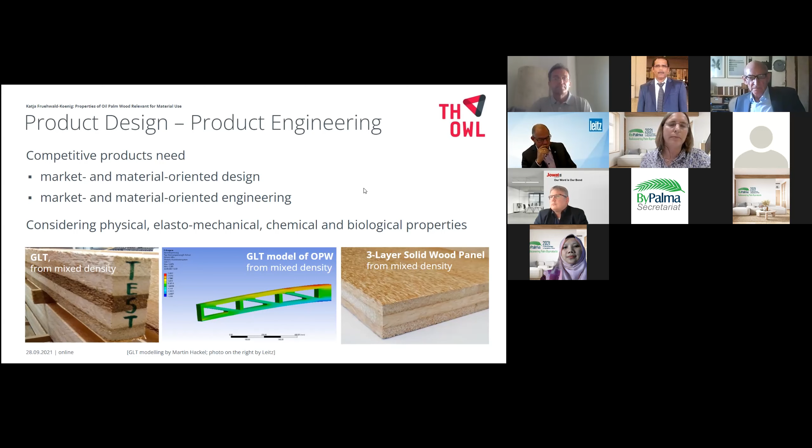Being monocotyledons, palms show a different anatomical structure compared to common wood species: only lateral and no radial growth, no growth rings, wood rays, or knots. The wood consists of lengthwise oriented vascular bundles embedded in parenchymatous ground tissue. The vascular bundles are composed of vessels and fiber cells formed in fiber caps with thick walls for structural stability. The ground tissue consists of thin cells and contains lots of water and sugars, and its density is low. From the structural mechanics point of view, if vascular bundles are considered as reinforcement and ground tissue as matrix, oil palm wood can be seen as a unidirectional long fiber reinforced composite. Next slide.

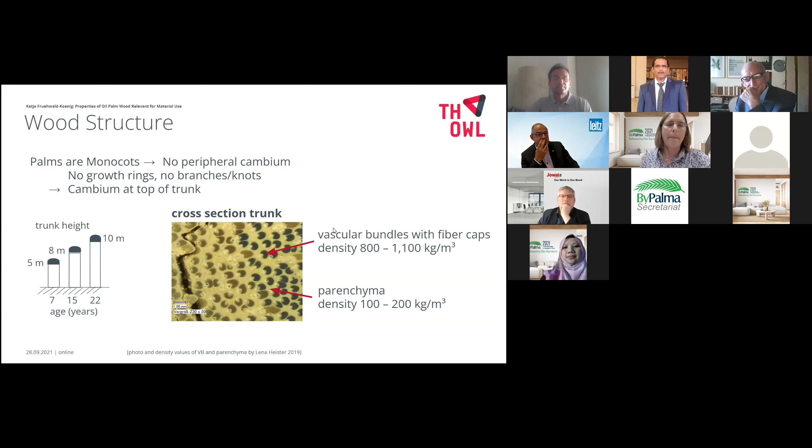The density, which influences various properties, declines over the trunk diameter from the edge to the center, and also along the height of the trunk. The moisture content is very high, opposite to the density.

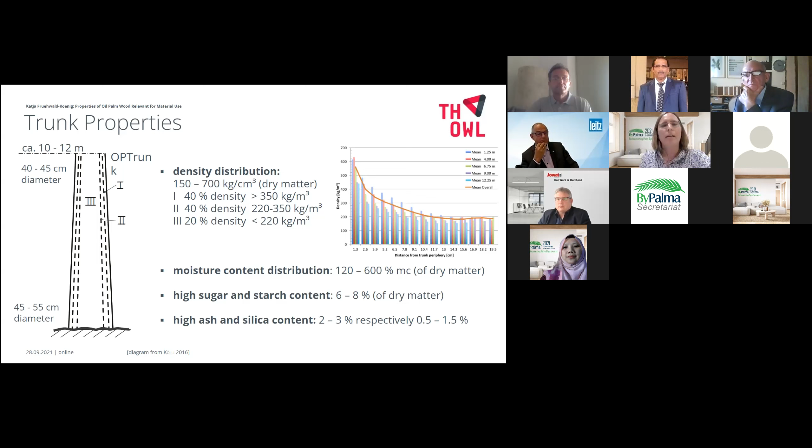In the past 35 years, the macromechanical properties of oil palm wood have been widely studied. Because of the property gradient within the cross-section and the height of the trunk, almost all investigations were performed on small clear test specimens. Most literature deals with the bending strength and stiffness and the strength parallel to the vascular bundles, but not the Young's modulus, mainly because of the easy preparation of test specimens and test procedures.

The literature lacks a systematic and comprehensive determination of the elasto-mechanical properties of oil palm wood depending on its density and location within the trunk, which is indispensable for product optimization and modeling.

In the context of two research projects, the elasto-mechanical properties of oil palm wood were systematically tested on small size test specimens: modulus of elasticity and modulus of rupture in bending, Young's modulus and strength in tension and compression, torsional strength, shear strength, torsional screw withdrawal and embedment strength, thermal conductivity and heat storage capacity. Due to the time limit today, I will concentrate on the tension, compression and bending properties parallel to the vascular bundles, but all results will be published soon.

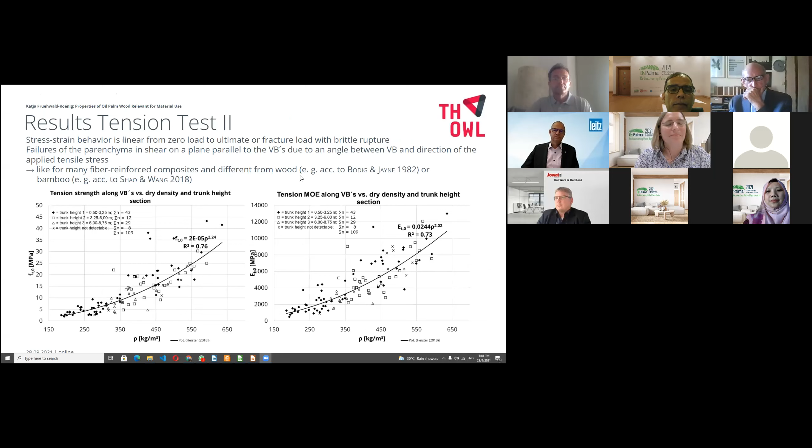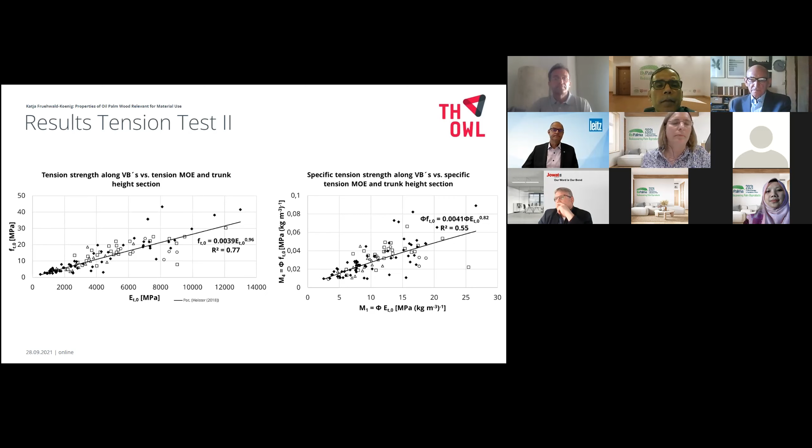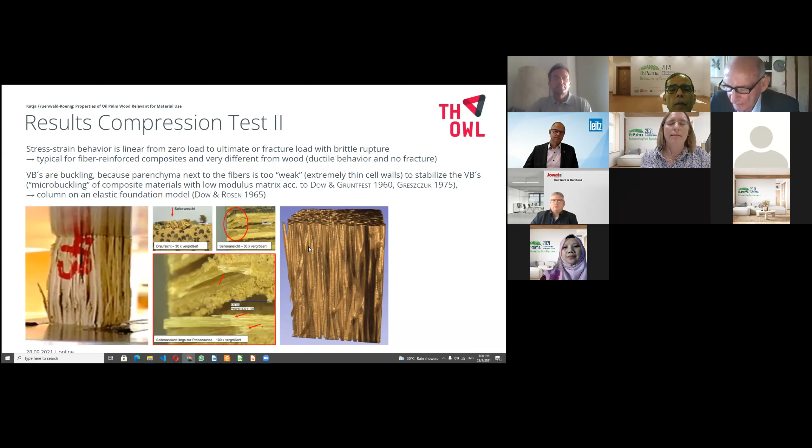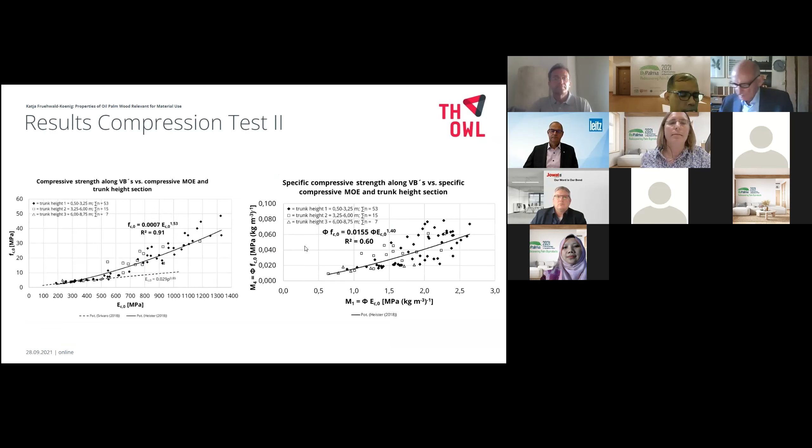Dicotyledons consist of a honeycomb-like structure of tracheids, the softwoods, or fiber cells, the hardwoods, while palm tissues are made up of vascular bundles having honeycomb-like prismatic cells and dense lines along the stem surrounded by ground tissue, made up of thin-walled polyhedral closed-cell foam-like structure.

Palm has a more heterogeneous structure in comparison to dicotyledons. Compression, bending, and tensile strengths increase with density. With increasing density, compression strength is above bending and tension strength. This is different from common wood species.

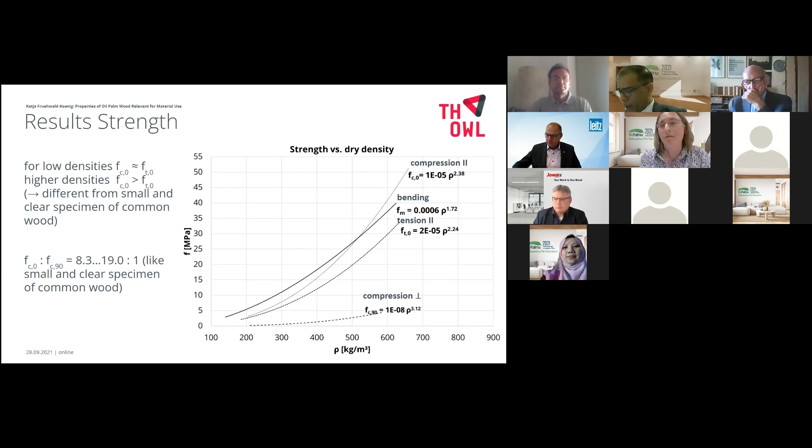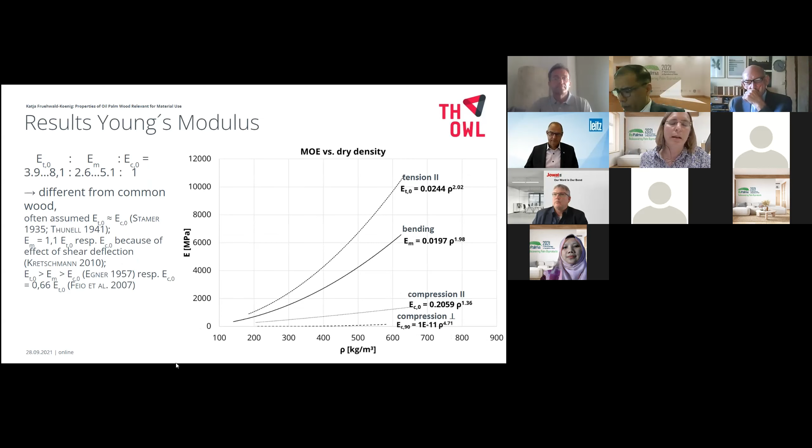Because of the power law relationship between the Young's modulus and the density, for a minimum weight design by Ashby, the calculated performance indices for oil palm wood are rising with the density.

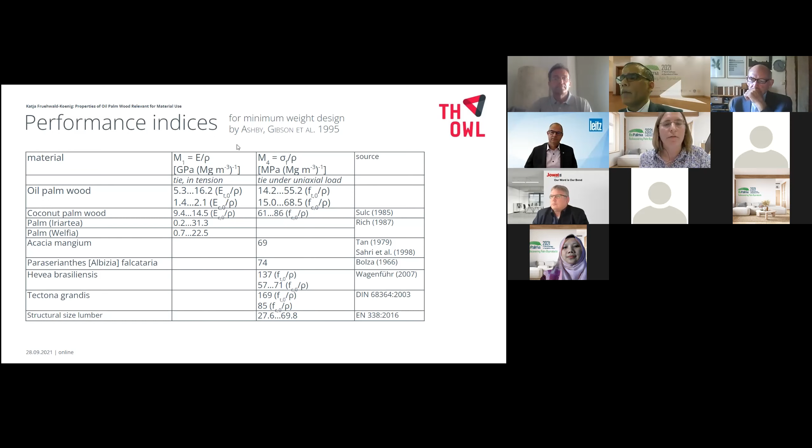The specific strength M4 of oil palm wood is lower than the values for small clear wood test specimens, but is in the range of structural size softwood lamellas. The specific modulus M1 in tension is in the lower range of common wood species, even for high density oil palm wood.

Conclusion: the materials of palm wood are challenging, but good for many uses. Therefore, the products need some redesign. Performance indices for minimum weight design by Ashby favor panel products from oil palm wood.

The compaction behavior at solid wood production needs to be clarified in terms of engineering. Because of the influence of trunk height on the properties, the lower 5 to 6 meters should be used for solid wood. Because of the property gradient within the cross section, the lumber should be longitudinally graded into homogeneous density stripes and reassembled into products, which I will show later in the presentation today.

The properties of larger glued structural members are expected to be similar to small specimens. The properties of oil palm GLT will be shown by my colleague Lena Heister later.

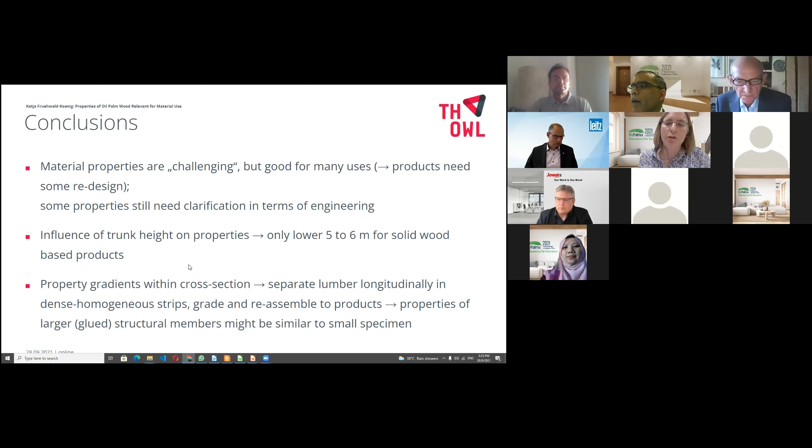If anyone is interested in more literature, please send me an email.